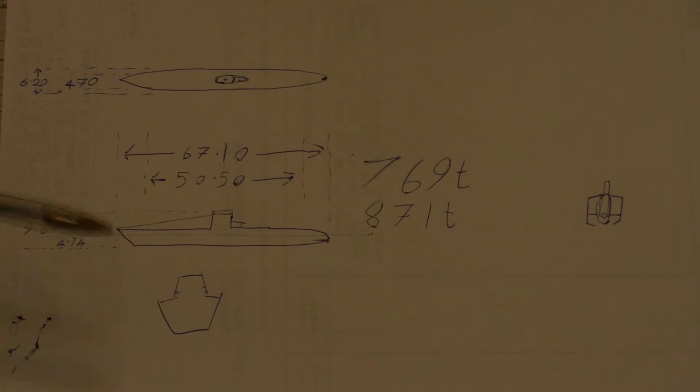In the case of most ships, that is kind of that shape. And you have hatches here which can probably resist a quarter of an atmosphere. In the case of a submarine, instead of having a lot of empty space inside the ship with all its decks and so on, they have a very cramped inner space and they have their empty space stuck on the sides. This is your pressure hull. This is the outer hull, and it's open at the bottom.

It has vent holes. This could seem crazy. You have holes in the bottom of your ship. If you're like this and you had vents at the top as well, the water would rush in, air would be displaced out of the top, and your vessel would sink. With a submarine, it's closed at the top, so that doesn't happen.

Let me just make sure I'm on the page. Yes, I am. Good. So we have water outside the submarine, and also up inside between the pressure hull and the outer hull. So your water level outside could be somewhere up here, with the water level in those spaces there.

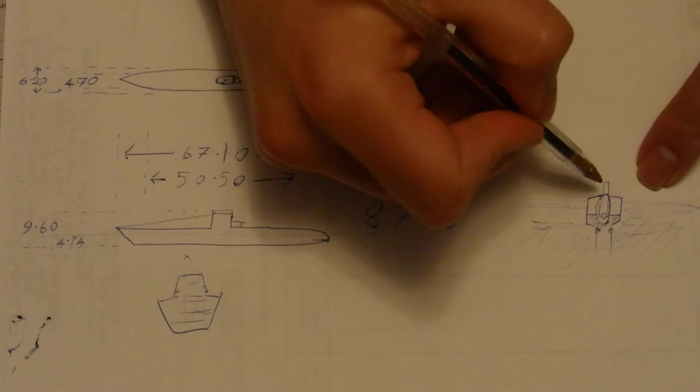Now if you want to dive, you could just open holes here, have valves there like exhaust valves on a car's engine cylinder, let the air out, let the water in. That'll get you underwater fast, which is kind of useful in a naval conflict situation. Anyone who's seen Das Boot will be familiar with the concept of the emergency dive, because there is a destroyer driving right at you and firing its guns in your direction. Or because there's an aircraft coming your way, trying to bomb you, or whatever else may go horribly wrong for a submarine.

What that does is let the water come up here and fill this space, or partly fill it, pushing this air out. If you're losing this air, you're actually losing mass, but not much mass. In the way Craig was describing it, you are adding this water to your ship, increasing its weight. From another point of view, you are losing that volume of air, decreasing your displaced volume and decreasing your buoyancy. Both come out to exactly the same thing.

The density of the seawater minus the density of the air, multiplied by the volume of seawater that has replaced air in this tank, is an increase in the net downward force on your ship. And glug, down it goes. You don't want to go down forever, you want to stop at some point, maybe 150 metres. You would close these again, and you can pump air from this compressed air tank out into here. The air being less dense than water, it'll take up space at the top and drive the water level down, forcing seawater back out.

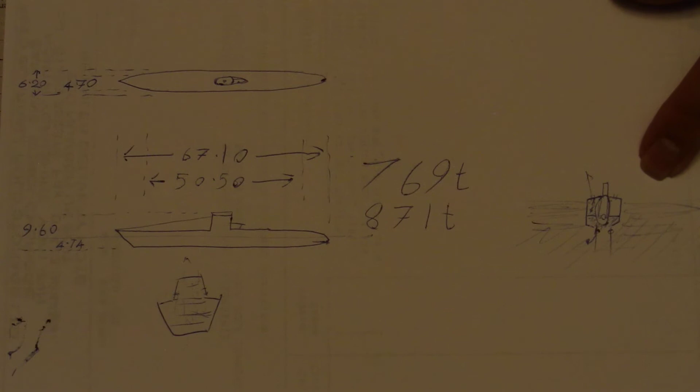This is not changing your weight at all if you're looking at the non-water part of the boat. The air is merely going from compressed in there to uncompressed here, but it is increasing your volume by whatever volume of seawater is driven out, which increases your buoyancy.

Alternatively, if you include the seawater as part of the weight of the ship, it is decreasing your weight by the weight of the seawater that's pushed out. It's just decreasing your weight by that much, and you're keeping exactly the same displacement, so your net force changes in an upward direction. It goes from down to zero, or from zero to up, or even from slightly down to slightly up.

And you would use enough air to push out enough water to get enough combined volume of pressure hull plus air in tanks to displace enough water to balance the mass of your boat and all its air, or to reduce the mass of water in your tanks to the point where that water plus your boat plus your air weigh as much as the water they are displacing. Either way, you can achieve neutral buoyancy with that.

It has a bit of a problem, the same thing as the scuba divers, that as you go deeper, the pressure is increasing. So whatever volume of air you've got here is going to get squeezed smaller and smaller by the increasing pressure, which decreases your displacement, or lets more water in and increases your weight, whichever way you want to view it, increasing your net downward force and making you sink faster and faster. Serious risk.

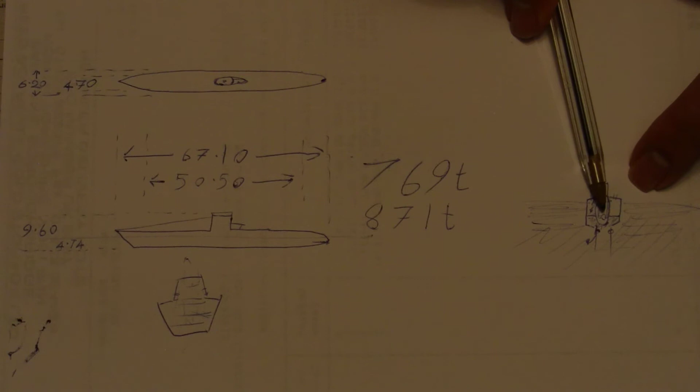There is an obvious lower limit where the pressure in this tank equals the pressure outside. At that point you can't displace the water. If you open the valves, nothing's going to happen. Any lower than that, seawater will actually come into your compressed air tank. At this point, you're fucked. So somewhere down the bottom of the ocean, there is a depth from which the submarine, no matter how well it's built, couldn't possibly escape.

Unless you have a pump as well as the compressed air. Unless you can put air into that tank at more pressure than the seawater pressure around you, you can't float. Maybe you could run the engines to max and point the nose up and drive upwards harder than your weight is pulling you down and get away. Maybe.

Of course, if a scuba diver's air tank on his back can hold 200 atmospheres, it's reasonable to assume that that thing can hold 200 atmospheres. That's already 2 kilometres depth. Nobody works down there, right? Maybe 3 kilometres. How deep does the ocean go? Well, the ocean goes to 10 kilometres, but a lot of it is less than 2 kilometres deep. And really, naval battles mostly take place on the surface, the submarine stuff mostly in the first 400 metres, so that's fine. More likely your pressure hull will fail before you get to the point where you don't have enough pressure to do that.

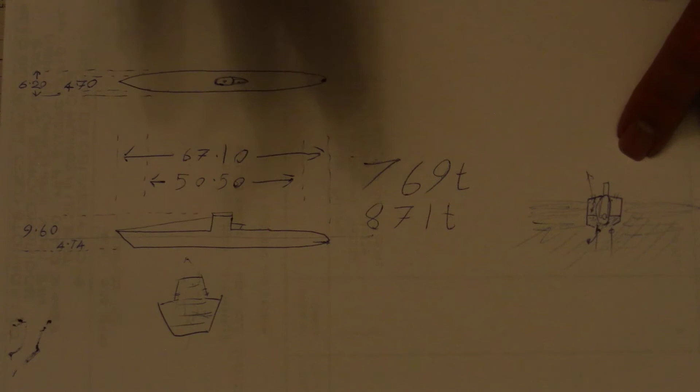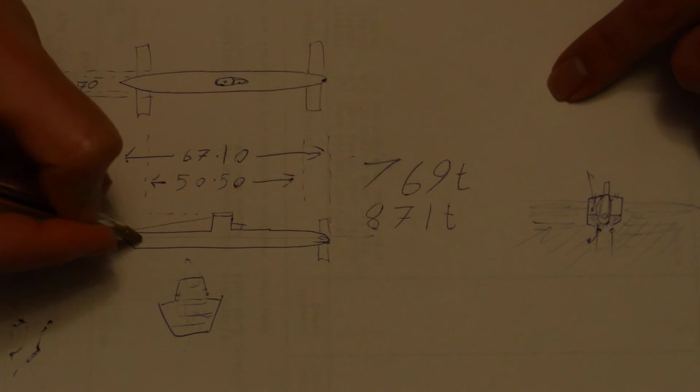However, you do have that issue of, as you go deeper, you get less buoyant. As you come up, you get more buoyant. So you have those fins, don't you? Front and back of the boat, you have wings. Maybe not quite that big, but you have wings you can tilt to push the nose up or down, or push the tail up or down as you go, and also rudders. Thus allowing you to drive your boat wherever the heck you feel like, rather than relying entirely on this.

There is another approach to this you could take, which actually beats the changing pressure problem, sort of. Instead of having those air tanks and the compressed air, or as well as that, you could have on your submarine... bear in mind, modern submarines are meant to stay under for months at a time, U-boats for hours at a time.

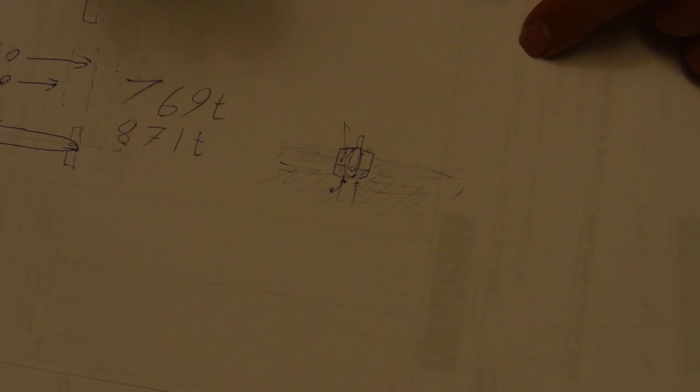Yeah, one thing that came up: if you were happily cruising at 50 metres and you wanted to go down to 100, you would pump the air from this tank into that tank, not vent it out. Because if you vent it out, you create a stream of bubbles on the surface, and U-boats are meant to be hidden.

Anyway, you could have, on the side of your boat, front and rear, so that you can adjust buoyancy at the two ends separately and actually make it nose heavy or tail heavy or balanced, tubes open to the sea at one end. Actually, it should be open to the sea at the inner end, I believe. Close that. And open to air tank at the outer end, each with a piston in it.

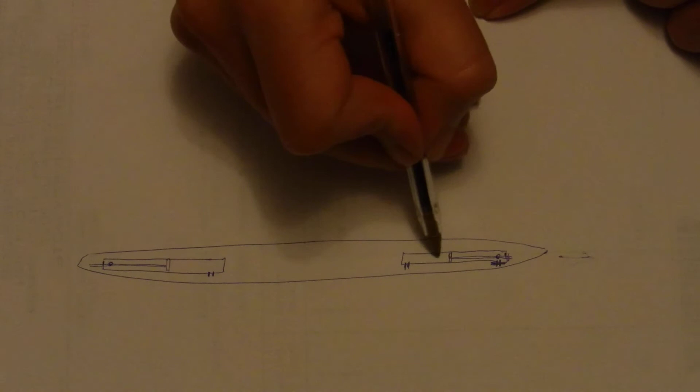This is just a thought here. See, I've drawn the pistons going on the dry side so that you don't have water pressure trying to get into your piston system where it goes through. But of course that means it's sticking off the end of the ship, so maybe your piston should go this way on the wet side. Also, you get more volume for less piston movement if the piston is on the wet side. Okay, redraw. Have a thing, something like that.

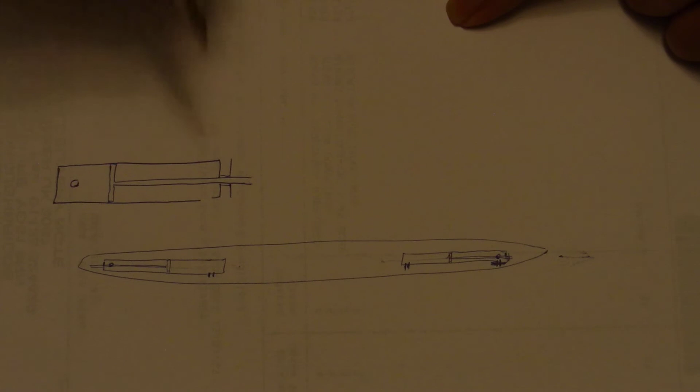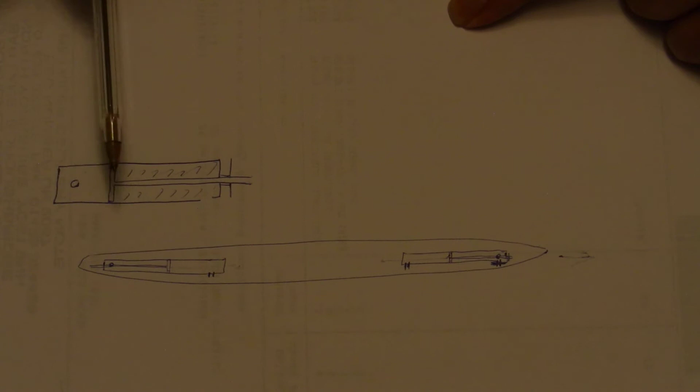With a piston for a pressurised chamber, so water can't go through because the pressure gradient is that way. Ha! With water in here on this side and air on this side. This way you could move the piston back and forth, and the position of the piston would control the volume of air and therefore control the volume of water, and control your displacement or your total weight, whichever you prefer.

And then, as long as the machine that moves this piston is strong enough not to care about the water pressure increasing as you go deep, you get to take advantage of something that in GCSE physics you'd probably be told doesn't exist.

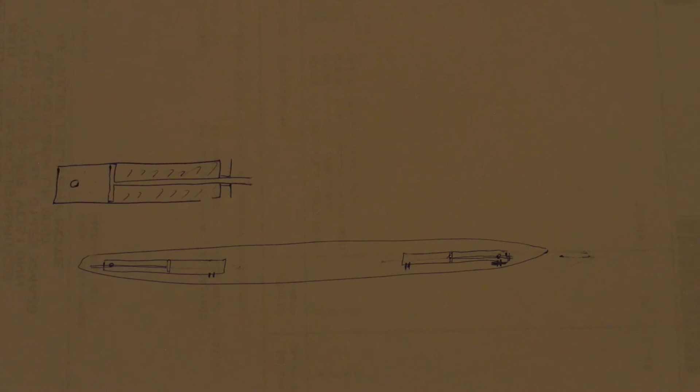That's a scary thought. I just agreed that teachers lie to you. That.

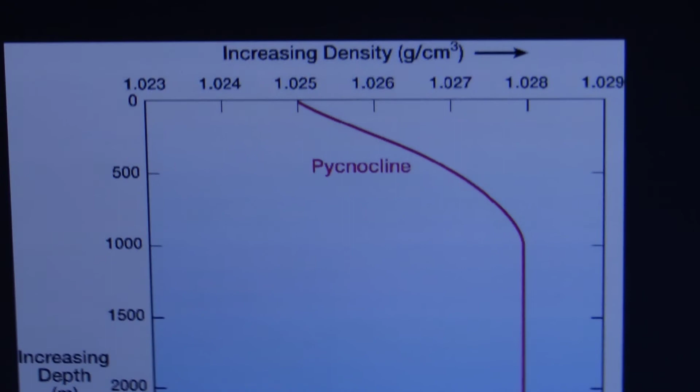Focus. That's something you might get told doesn't exist in GCSE physics. That is increasing density with depth in seawater. Now if you look along the top, you can see that, in grams per cubic centimetre, kilograms per litre, tonnes per cubic metre, they're all the same unit really, you're only going from 1.025 to 1.028. That is a tiny increase, very little compression happening, but it's there.

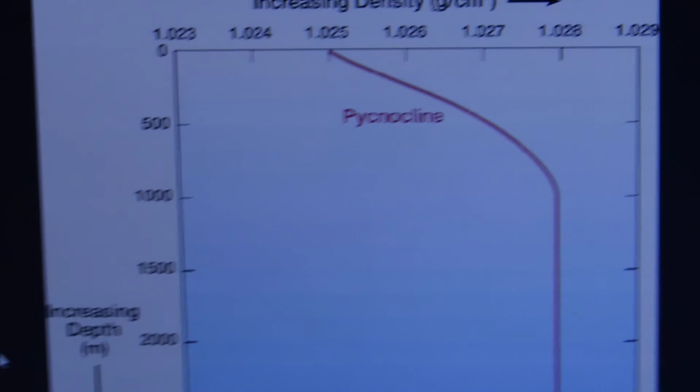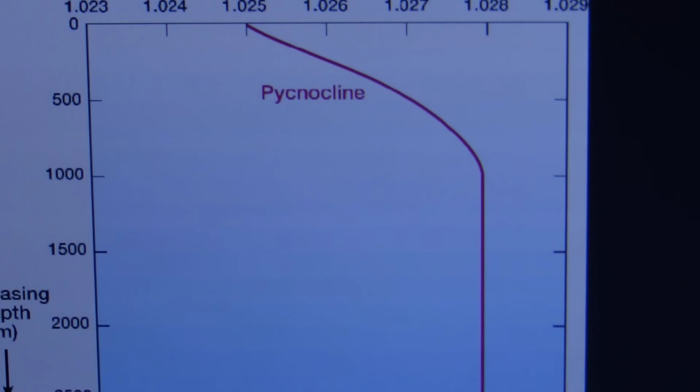And if you can control the volume of your fixed mass submarine, because it's not blowing bubbles, it's not dumping sewage into the water, it's not taking air in, it's staying at exactly the same mass. Nuclear sub. Oh, wait, does a nuclear sub stay at the same mass as it uses nuclear fuel? Yeah, near enough the same mass. It's converting some of it to heat, and that does get lost to the water.

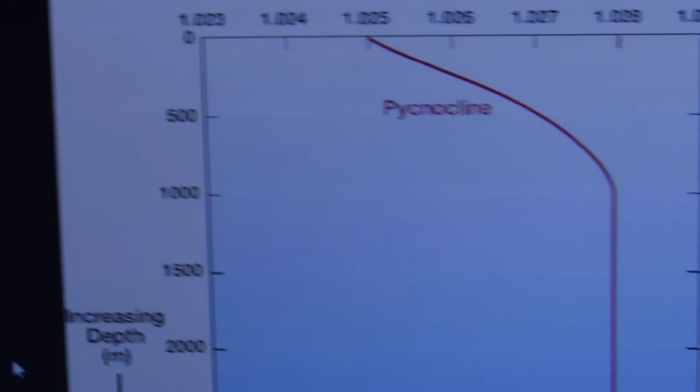But it's pretty much a fixed mass, and you can control the volume of it, you can control its average density. If the water is increasing in density with increasing depth, down to, notice, 1 kilometre deep there, if you can control your ship's average density finely enough, you can put your average density just say there, and your ship will be neutrally buoyant at that depth.

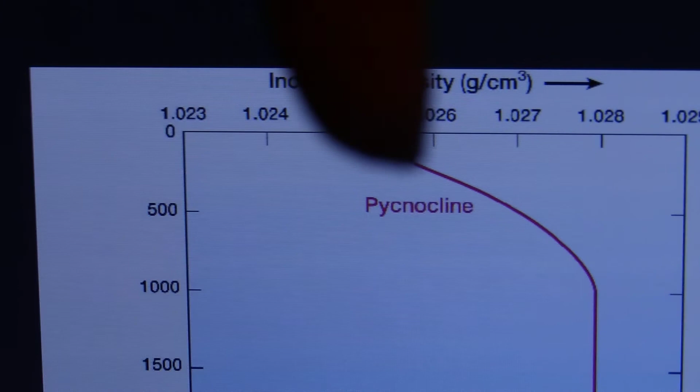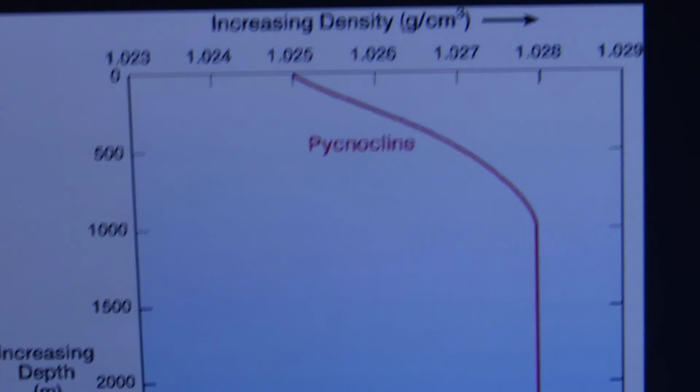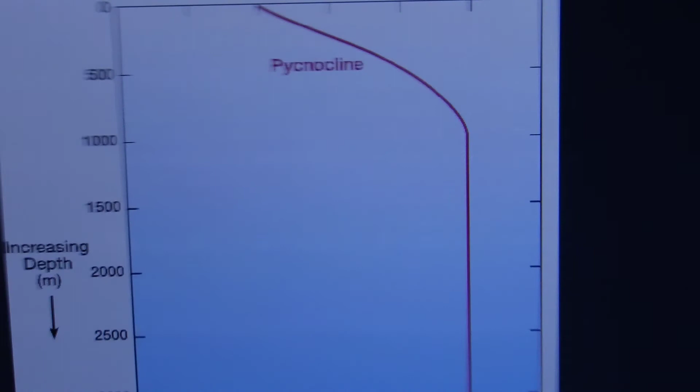If you go any deeper, the water gets more dense, but your boat doesn't, and your boat bobs upwards. Go any shallower, you're going into less dense water, and your boat will become negatively buoyant and sink. So you could actually set a piston buoyant rather than inverted cup buoyant submarine to be neutrally buoyant at a particular depth, and it would stay there, which is probably kind of handy.

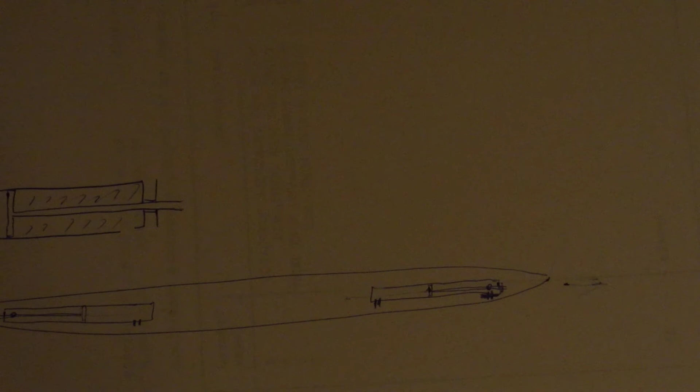It's also what happens with a helium balloon if it doesn't go high enough to pop. It's going to rise up and expand as it rises, because the pressure is dropping, but be rising into thinner and thinner, less and less dense air. If it gets to the altitude at which it is neutrally buoyant, then it'll just stay there. It'll go up and down a little with the changing weather, but it'll stay at roughly that altitude.

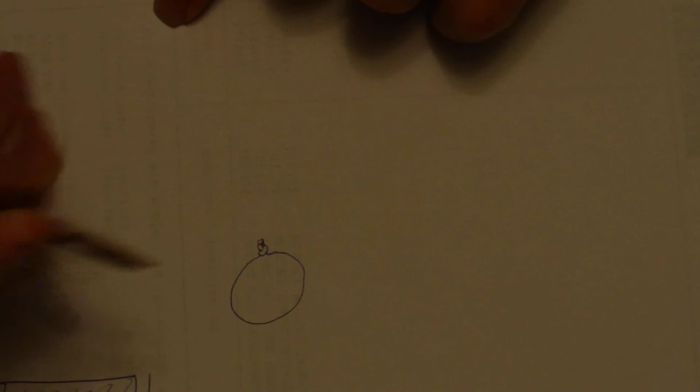Of course, your volume is going to change very slightly as you go down. Your volume is still going to decrease because seawater ain't the only thing that's compressible. So is steel. Your entire submarine is going to get smaller. And you can demonstrate this one in the swimming pool, again, if you can swim. Get a balloon, a normal balloon, inflated, with a knot tied in it, full of air. Or partly full of air.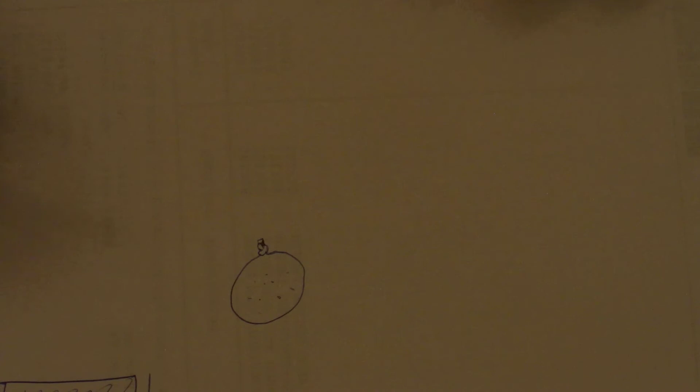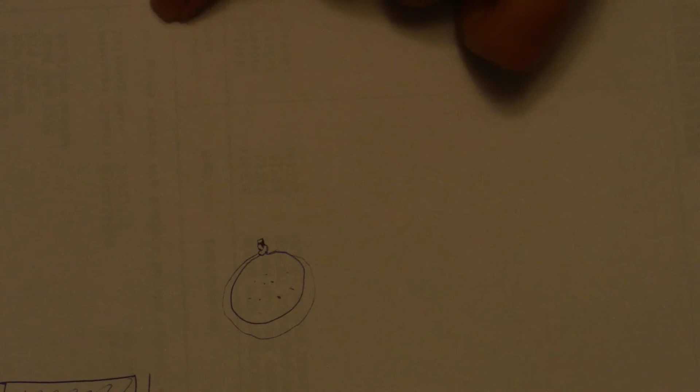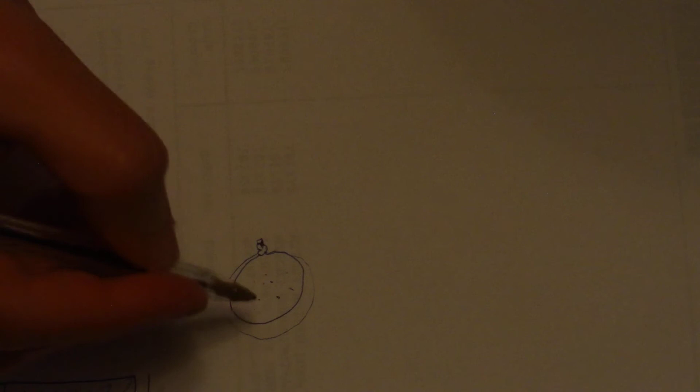Let's half inflate a balloon at sea level, take it up a mountain, and it will expand due to the decrease in air pressure. That's a heck of an expansion because it's a cube expansion. What is the cube root of 2 anyway? Let me just check that. I think it's 1.26. Cube root of 2. It is indeed 1.26. So if it gets 26% bigger that way and that way, it's doubled in volume, indicating a halving of the external pressure.

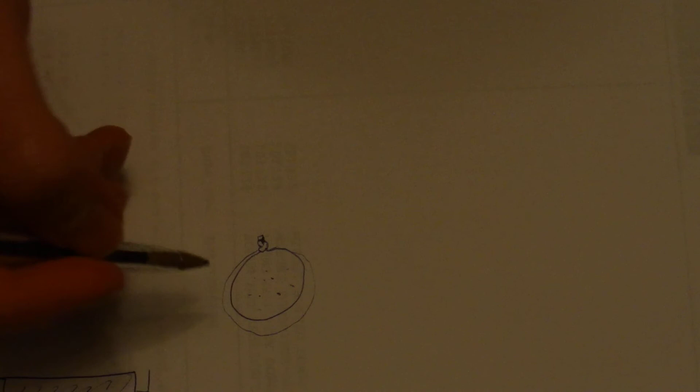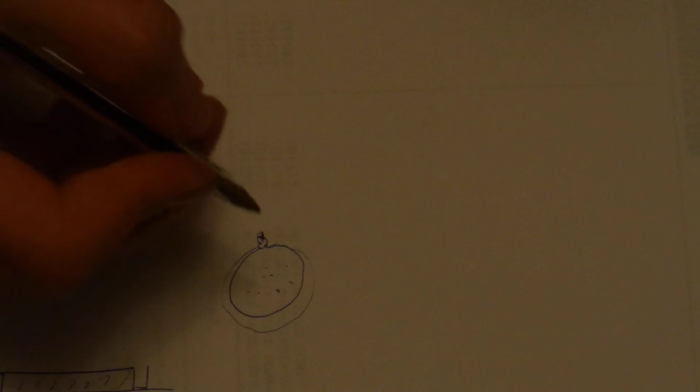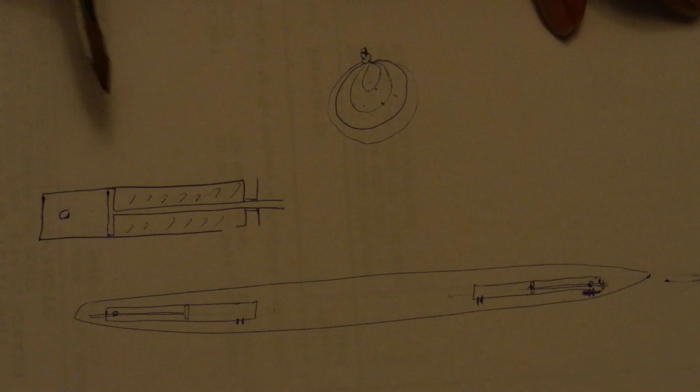If you take it into the swimming pool and pull it underwater, you can feel the buoyant force trying to push it back up, approximately equal to trying to lift that much water. But you can also observe that the balloon will get smaller and smaller as the water is squeezing it. Now, a steel pressure hull doesn't shrink that much, but it will shrink just a little. However, I think that would allow you to simply go, yep, I want to be neutrally buoyant at 150 metres, set it to 150 metres, float along there. You could even mark your depth on this.

Why did this come up? It came up because some guy was, well, I wouldn't say arguing, blathering. Blathering is probably a good term for it. About submarines, saying that submarines prove the Earth is flat because if the submarine stays at a fixed depth in a flat ocean, it's fine, but if it tries to stay at a fixed depth in a curved ocean, it'll go out into space.

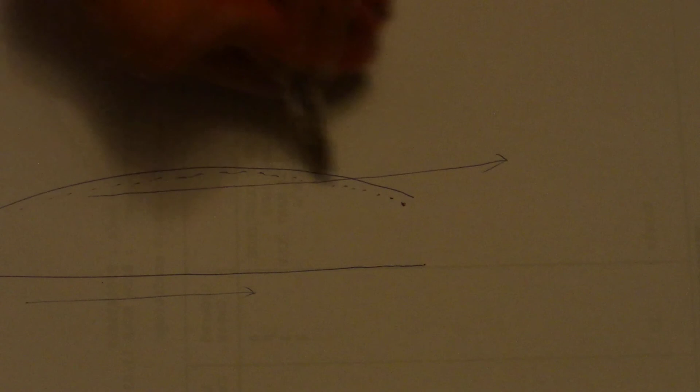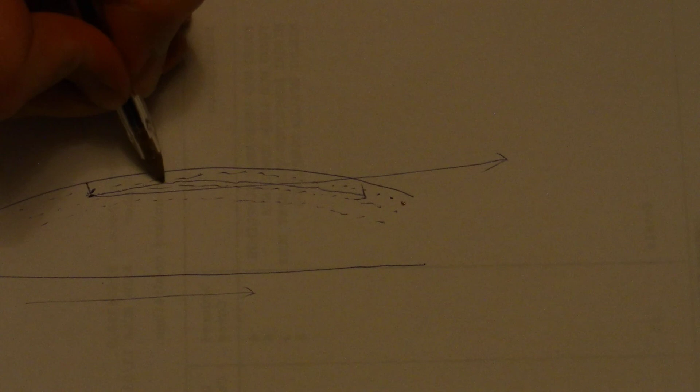This is clearly what cool hard logic would call bollocks, because it's set for depth. That is a depth. That is a depth. That is a depth. If you set it for that depth, it is going to cruise at that depth in between those other depths, like that. Because that's where that depth is. Depth is from the surface, not from some arbitrary straight line up here.

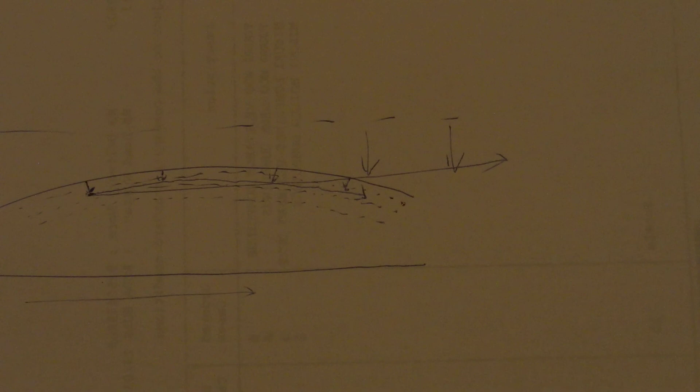Have I mentioned that the guy's an idiot? I probably should mention that the guy's an idiot. That didn't even go ding, come on. There we go. Because flat earthers are idiots. Not the best dinger, but a dinger.